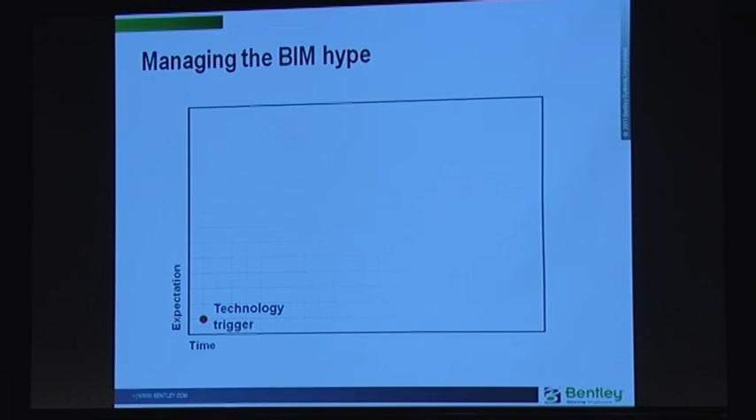Just want to touch on the BIM hype. There's an awful lot of hype around in the industry. You can't open a magazine or journal or sometimes even the financial pages now without BIM splashed all over it. People saying, we use BIM, we save 10%, we did this, we did that, it's fantastic. But there's a well-recognised hype cycle that applies to things like mobile phones, internet shopping. Something new comes out like BIM, and there's a huge amount of expectation.

Call it the peak of inflated expectation, where people come to a presentation like this, they see a great sexy video, what some people call Hollywood BIM. They think that's great. They go back and they spend thousands of dollars on a package of BIM, or millions of dollars in some cases. But they quickly realise it doesn't actually do them any good. It doesn't live up to the hype.

They install this thing on a big shiny machine in the corner, and it doesn't create their drawings automatically. They still get clashes on site. They can't set things out on site properly. So they've invested this time and effort. And in fact, some designers and contractors I talk to say they're spending many more times the amount of money to produce drawings or construction documentation using 3D tools, using BIM, than they were using 2D.

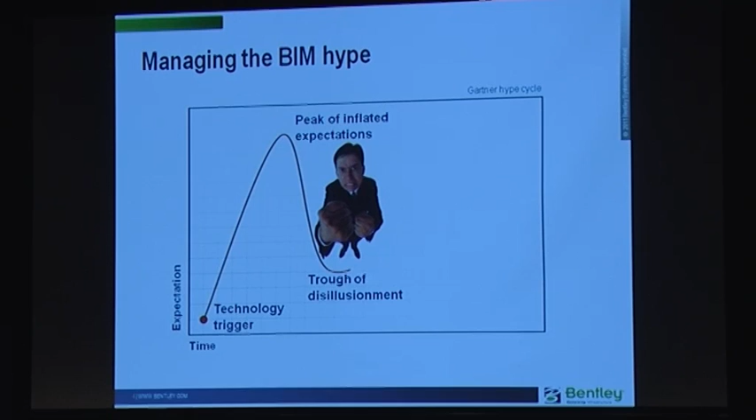So it's a big issue. Now, as we all know, BIM does give us benefits. You know, it does do some great things, but you have to work at it. So gradually people understand what it can do, and you reach a point when it's actually giving you some benefit.

Now, it could be that you're just doing 3D clash detection, it could be setting out on site, it could be cost estimating, any number of things that work for you as a business. But it's important to understand it's what it does for you individually, not just this great big panacea of BIM. So the trick is to try and go from somewhere halfway up on the left-hand side before you get to the peak and kind of head off to the plateau.

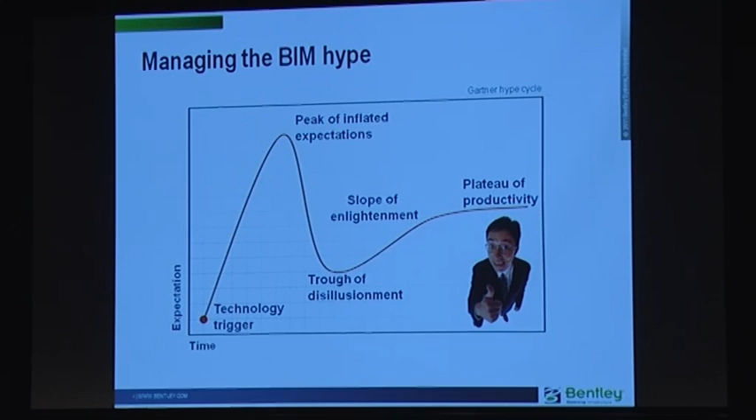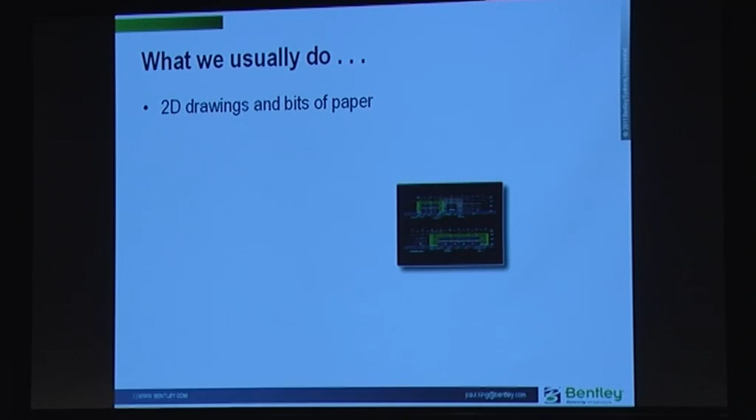So what do we usually do as an industry? Well, we use 2D. Okay, we've used 2D paper for years. Increasingly, we're using electronic paper, so we'll issue PDFs, but essentially we're just doing 2D. So we start off with the designer. The designer hands a whole pack of paper across to the contractor, and the contractor then sits on site, makes sense of this box of paper, or tries to build the building.

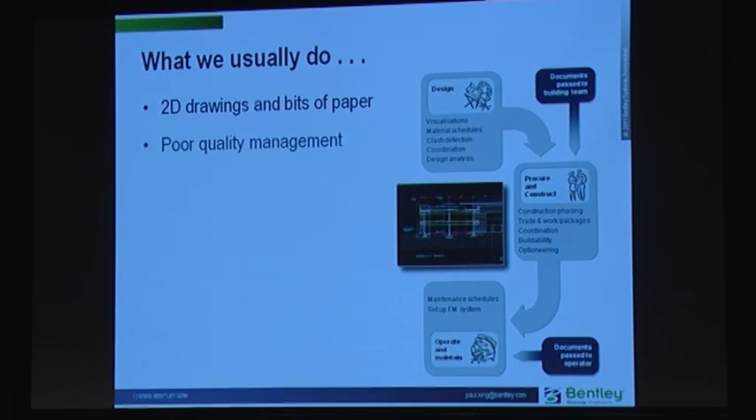And at the end of construction, passes across a room full of paper, boxes, plan chests, brochures, everything else, all goes off to the poor FM guy, who on day one of the contract opens up boxes and finds he's got the contractor's holiday brochures and memos and all sorts of things stuck in a box that's marked handover information. And we know it doesn't work. Again, without going into detail, we all know the issues about passing information around the supply chain, where it doesn't work.

And this figure, it's another waste figure, pick a number really. This was in The Economist magazine a couple of years ago, where they looked at global projects. And they said typically 30% of the project cost is waste. Now, some of that is rework, but a lot of it is in things like variations. It's in the fact that things go missing. There are errors in drawings, in site works, all sorts of things, but this all gets hidden in contingencies and extras and revised programs. But there's a lot of money in there that shouldn't be in there.

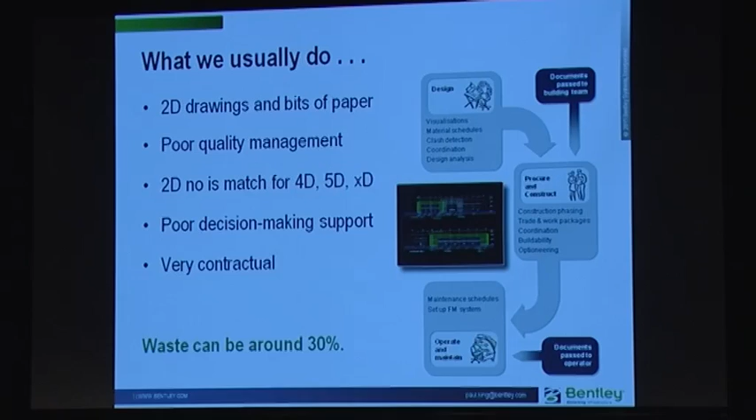And there was a report from the organisation called NIST in the United States a couple of years ago. It's quite a thick document. It's worth a read, but it's got some highlight figures in there. And it said that 40% of design time is just spent locating and validating information. So forget whether it's 2D or 3D.

I spent my time on site. You've got two drawings, exactly the same number, the same revision, but they show slightly different things. In one the manhole's here, and in one someone's moved it over there. And you spend time trying to work out which of those two is correct. Or maybe neither's correct. Maybe there's a third version floating around somewhere.

The second key point was about entering information once and reusing it. So this is starting to get onto the BIM theme, where people will create something and it's then reused for lots of different purposes. So you have this pump that sits in the BIM MEP system in your model. If that can be used by the cost planners, by the programmers, by the purchasers, it all starts to save money because you're reusing that information.

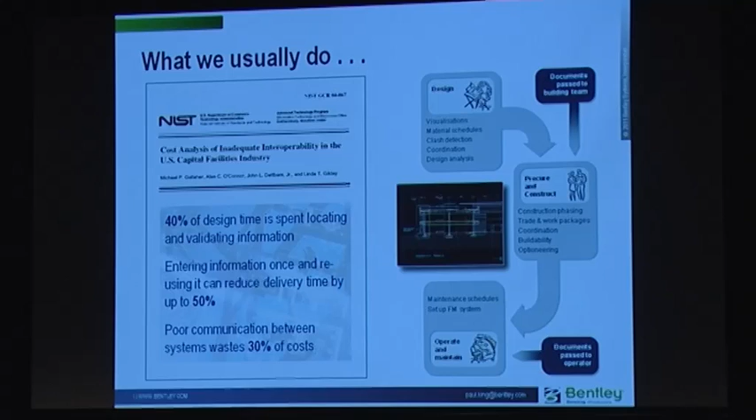And poor communication between systems, again, wastes a lot of money. So that's starting to get into things like BIM interoperability. Can I take a Revit file and put it into a Bentley application? Can I take a Bentley application and put it into an ArchiCAD file, and so on?

So BIM's a better way of doing it. Again, thinking about our own version of BIM, what relates to us.

Now, as an industry, we get very excited by what some people call Hollywood BIM. It's the moving images, it's that we sit down with clients and we show them, we walk through. It's all the clever, sexy stuff that looks good. It never really goes beyond that much. We're starting to go into construction, but we're not really integrated into construction yet.

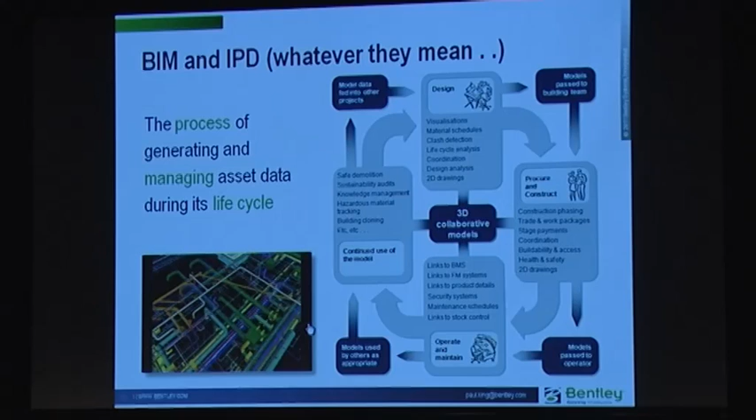Paul was just talking about these different file formats as well. As a contractor, you're faced with receiving all these different bits of information. A typical design team will be using Revit, ArchiCAD, Bentley Mechanical, a whole range of different tools, SketchUp. Next year there could be Google BIM or Google Mechanical BIM; all these things are constantly coming onto the market. And it's important that project teams can use the best tool for the job.

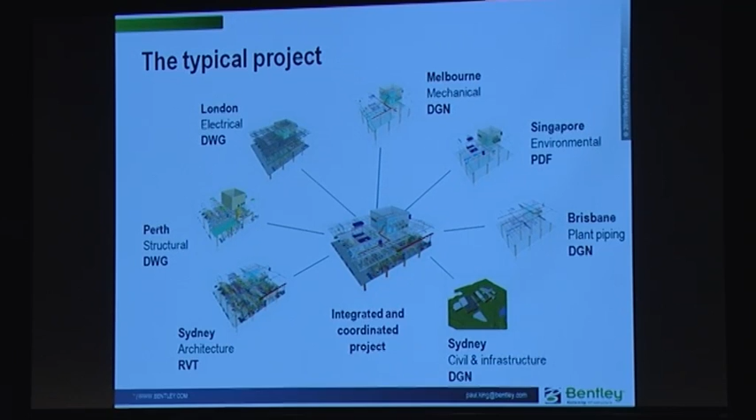It's very rare you can find one client that will say, right, we only use one package and only one version of that package. It's very difficult to do that. The Bentley approach is what we call federated models. And it's a very efficient way of working when you've got larger teams. So each discipline creates their own stuff, if you like, their models, their drawings, their spreadsheets. And in this environment, the important thing is that only the originator can change their content.

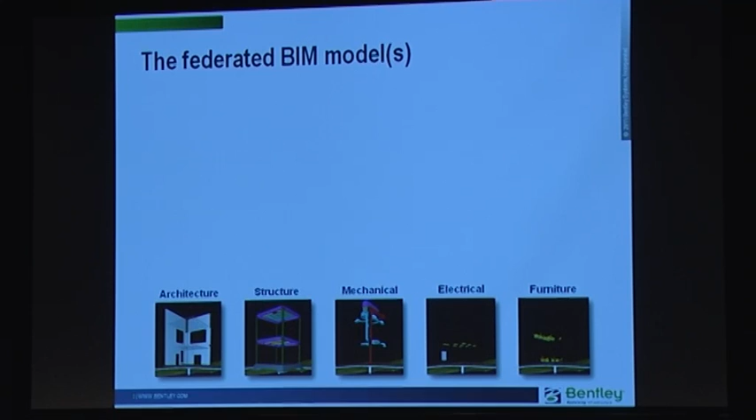So if the architect here is creating his walls, when he puts his models into the shared environment, you can't have the structural guy moving an architectural wall. Okay, so ownership has to remain with the originator. And it means you can bring those together, as Paul was just saying, for things like clash detection. We never clash a whole building in one go.

In my mechanical services background, we'd do things by floor or by zone, or you'd clash a plant room or a riser. So what you want to do is be able to bring that different content together at different times, in different formats, for different purposes, but do it in a way that's managed. So going back to ensuring if I'm bringing those different parts of the building together, I know that I've got the latest version. I've got the version that's correct for doing coordination.

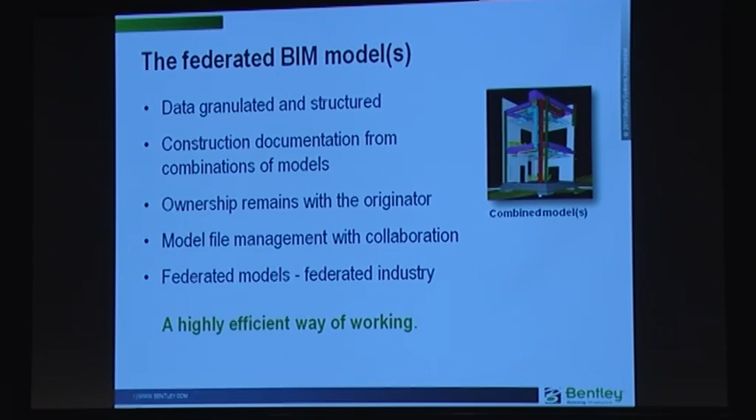So it's very efficient. Again, just a few models. We all do our own thing. We've got the structures, the mechanical, electrical, piping, hydraulics, all doing our different version of a design submission for that particular project. And we bring those together at different points for different purposes.

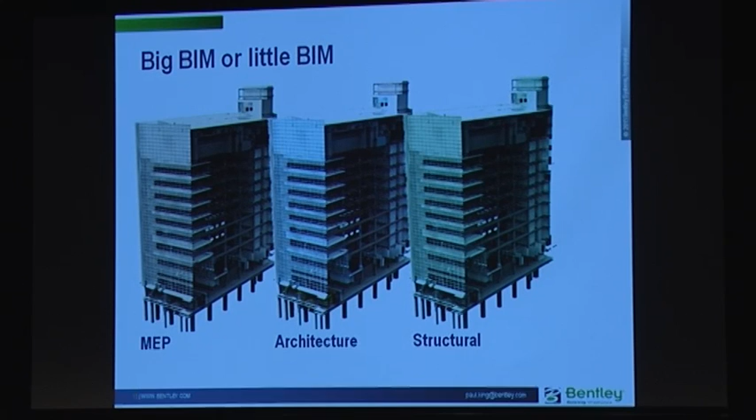And I think someone mentioned lonely BIM earlier, where you've got these pockets of expertise all doing their own thing. So in this case, the different disciplines are all focused on delivering their construction documentation for the project. And that's what we call little BIM. So it's giving benefit to individual practices, whether they're designers, contractors, or other people in the chain. But it's really about that individual task.

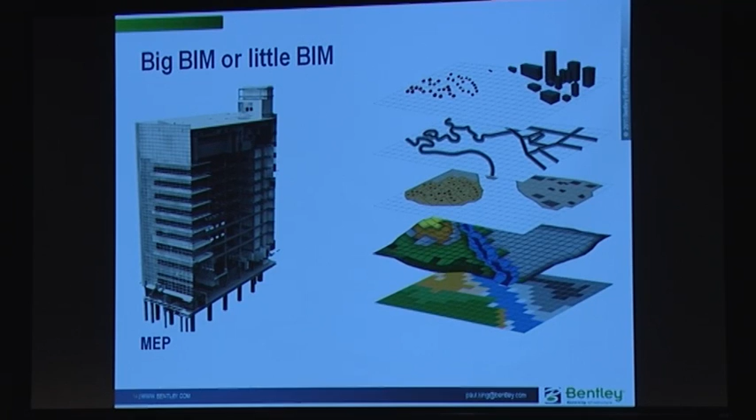But buildings exist in the real world. So they sit on a site. That site's got a topography. There are underground services. There are roads. There's rail, water courses. There's mapping. There's geospatial information. So although we talk about BIM, really all these other disciplines have got their own version of a model. So there's geospatial, power, water, bridge, and a whole host of others that all contribute to this virtual environment. And in Europe now, they're beginning to talk about asset lifecycle information modelling.

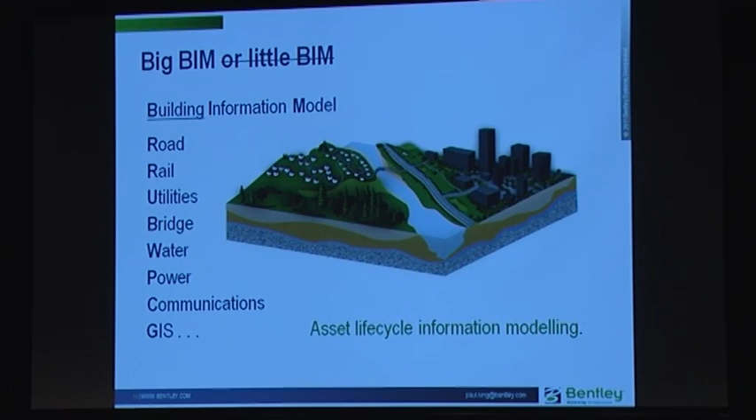Because when you talk about BIM to a road designer, they just think, it doesn't apply to me. I'm doing roads, I'm doing a different version. So it's not the building. But really building refers to the process of modelling. So it's more about the asset.

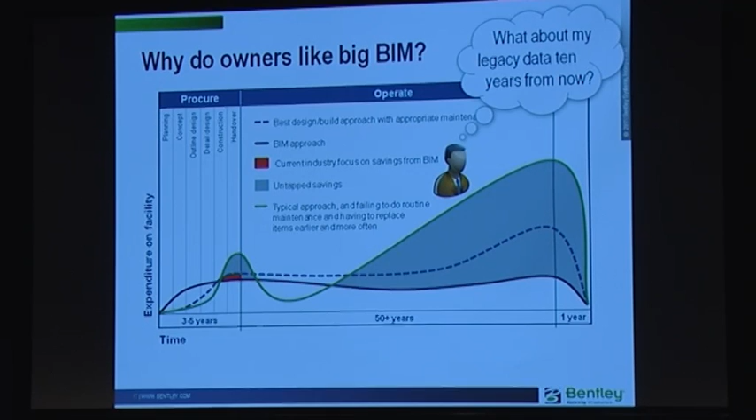Another thing I've recently been picking up on with owner-operators is they say, yep, that's great, that's why we want BIM, but what about my legacy data? I've got all this great stuff given to me as models or databases - what do I do in ten years' time when the project team's left, the contractor's gone, this particular software package is now two versions later, I can't read my old files? How do I manage that whole legacy issue? That's another big factor clients are starting to ask about.

So let's look at how we can start to address some of that with things like collaboration and coordination of information. I break it down broadly between pre-construction and construction. On the left-hand side, pre-construction and design, we're dealing with lots of technical content.

We've got models, drawings, spreadsheets, a whole host of technical content that makes up the design solution. And on the right-hand side, we've got the distribution of e-paper, essentially of documents, construction documents used for managing the installation.

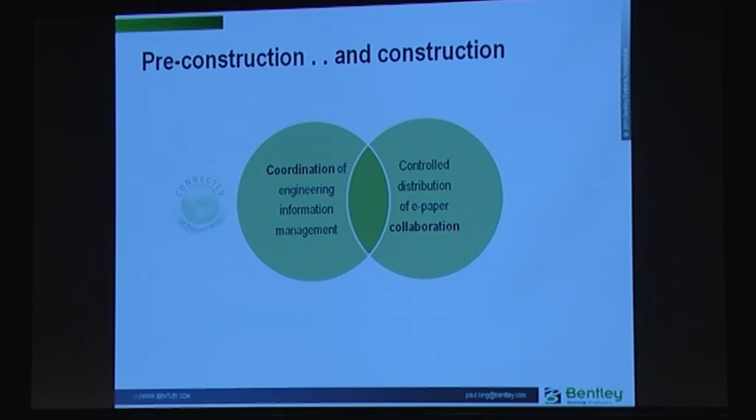There's a big overlap, and getting on to why I'm talking this afternoon - looking at ProjectWise. In the session we've got now, there isn't time to go into a presentation and show you some of the features and functions - we can do that outside or afterwards. But it's important to understand that relationship between coordination and collaboration.

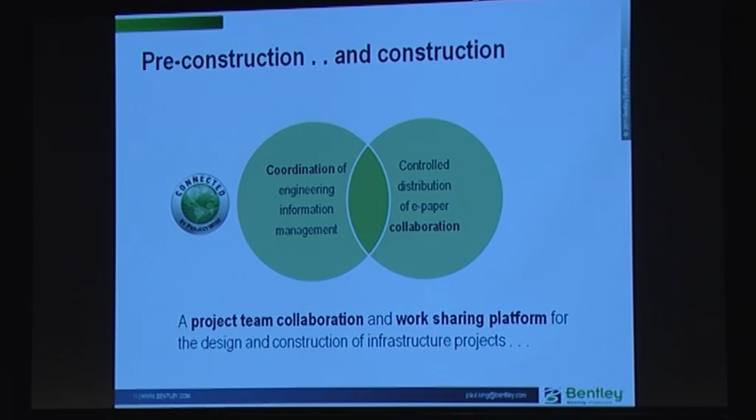Coordination at the start is all about ensuring those 3D models that get created, to create your construction documentation, are done in a controlled way. It ensures you only have one copy of something - you don't have multiple copies of the same thing floating around. ProjectWise is a way of creating a managed environment. So if you want the cost planners to be entering data into a particular model or drawing, they take that from a central repository. That means it can't be overwritten, it's the correct version to use, and it can't be overwritten by somebody else.

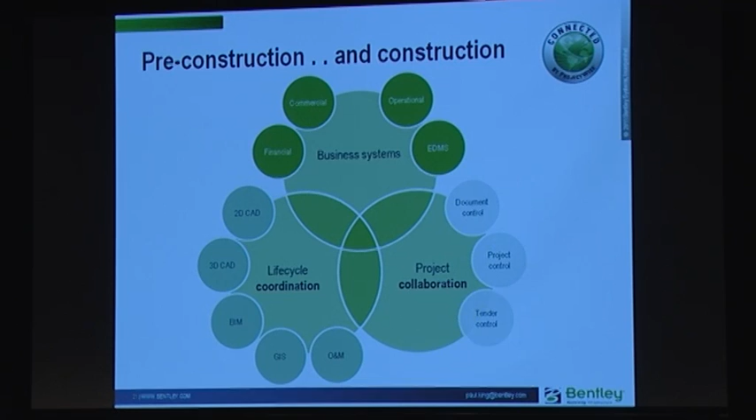And let's not forget, all this exists in the context of a business. Your company will have its own business systems for finance, HR - all these different systems that make up your environment in the company, and they're all interlinked. So in our coordination system, like ProjectWise, you're storing your drawings, your models, your data, operation and maintenance data, perhaps geospatial information. You've got your commercial systems. On the right-hand side for construction, we've got document control, project controls, all your tender information, trade package information, and so on.

So our model comes out on the left-hand side. It's all controlled within ProjectWise and managed in a federated way, so you don't have to have one big model - you can create lots of individual content that's linked together. ProjectWise will track the versions, the history - if you want to know who's opened the file, who last used it, what they did, even when it was deleted, you can see that.

And then during construction, if the project team wants to issue an RFI, for example, that takes a particular drawing or model, again, we don't copy something across from one system to the other.

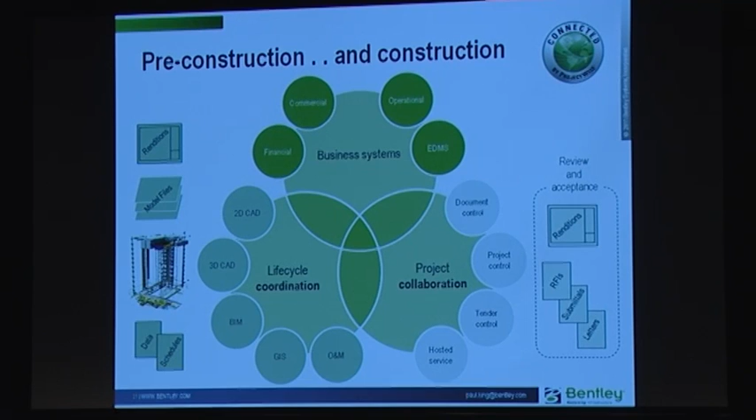That source content stays on the left-hand side within ProjectWise. Something like Primavera Contract Manager will just suck in and take out a link to that source file. And that's really important because this whole design iteration process goes on during construction as well. So if there's a change on site, you don't want the site agent to just take out a drawing and draw something in by hand. You want the structural engineer to move that wall or column and do it in a managed, controlled way, because they're the person that should be doing that. But all these things are linked together.

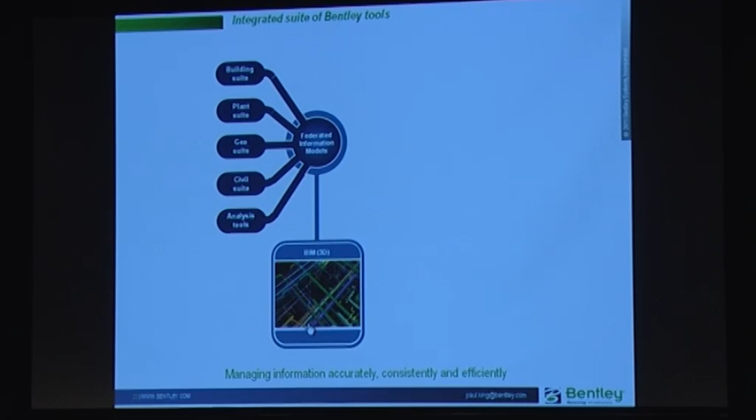So how does Bentley support these project teams? Well, everything starts with the models, with the drawings, with the content that's created in a coordinated way. Bentley has a number of applications broken down by suite, so building, civil, geo, and so on.

But importantly, Bentley's approach is to put a lot of effort into interoperability. Now, we're way off having that ultimate goal of one single transferable file type. That's some way off yet. But we do ensure that if you've got, for example, a Revit model, you can share that design data with someone working in the Bentley environment. Or you might want to take geospatial information and some mapping information.

FAB-MEP, for example, from TSI. If you want to take one of your Bentley models and put that into manufacture, again, you can take that across.

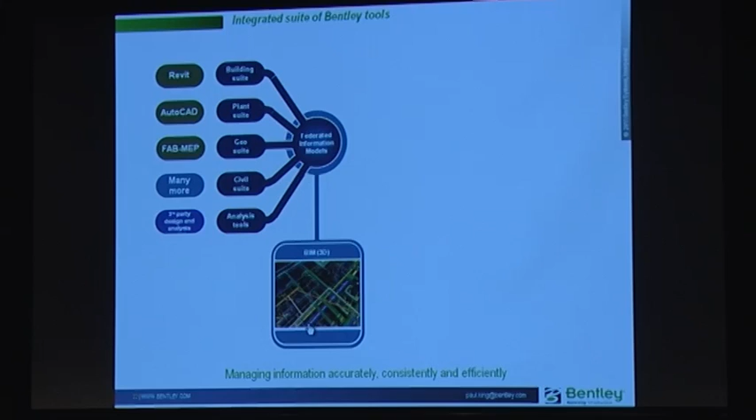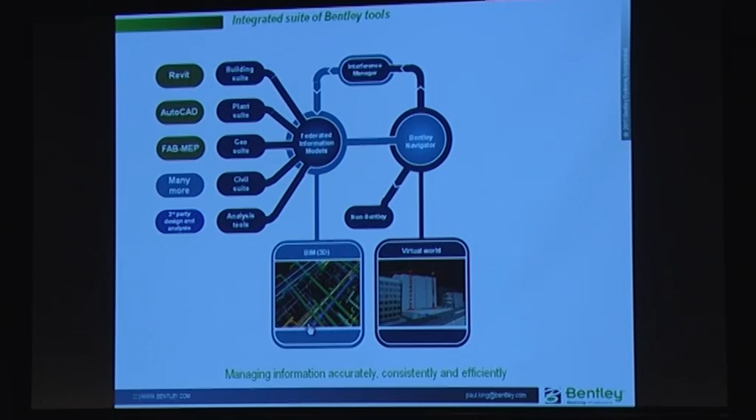Our version of Navisworks is Bentley Navigator, so whatever you can do in Navis, you can do in Navigator as well. And from that, you've got things like interference management, clash detection, and schedule simulation, 4D.

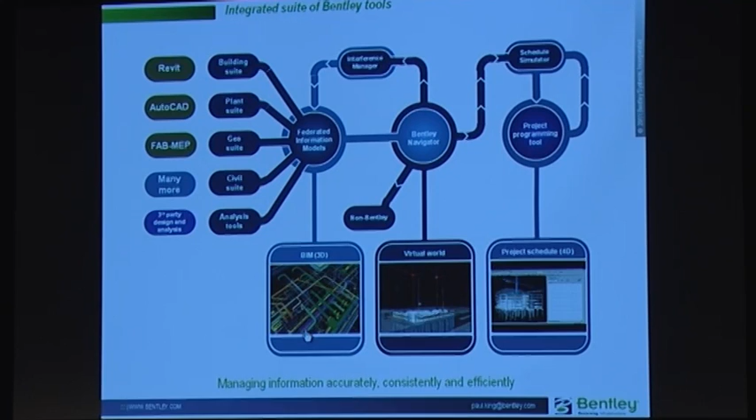Now, 4D is interesting to me coming from a construction background because I'd have design teams coming in saying, we're going to give you a model and you can do all this great 4D stuff. But in reality, the planners didn't want it. The planners are used to using their Gantt charts. They've got their own packages they like using. They don't want the 4D model. They might do it to demonstrate to a client how the building goes up, the logistics, but they don't use it for day-to-day work.

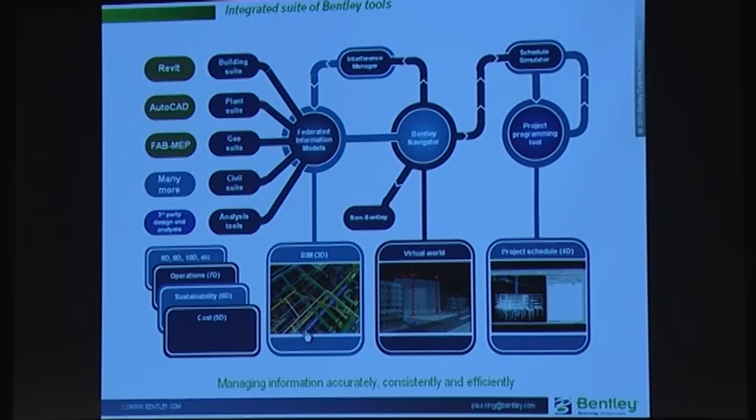And other people are talking about 5D, 6D, 7D, sustainability, life cycle, all these different things. But importantly, all this stuff is about reusing information, and it all comes from having that good quality design content. So once you've got that model, that data set up, correct, consistent and complete, all this other stuff can then flow from that.

And the final part of the jigsaw is then ProjectWise. So what ProjectWise does is manage all that technical content, wherever it's coming from, in a controlled way. So if you're doing a clash detection review or a design review, it's not a case of sending off a drawing or a model to an FTP site.

You go into ProjectWise, you assemble that content you want, you make your red line marks, your comments. That's then stored back in as an overlay file that notifies the person concerned they have to fix something. And because it's integrated as one managed workflow, it means you can track those changes and ensure things are corrected when they need to be.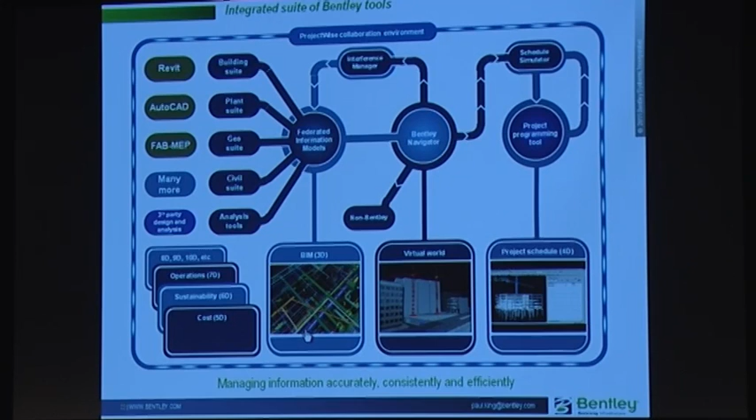So looking at ProjectWise for contractors specifically, if you're working in the mechanical contracting world, your designers are creating all your great stuff. When it comes to site, you've got this blizzard of information, all these deliverables coming at you. It's Revit, it's AutoCAD, it's Bentley, it's Tekla, it's SketchUp, it's everything - files, 2D, 3D. And the guys on site, as Paul was saying, it comes back to: well, okay, what do I build? I just want to know what to build. Yes, maybe it's in 3D, maybe it's in 2D, but I need whatever's appropriate for me.

Just to emphasize the fact, some people want models, but that's very rare in the industry - few contractors want models. Most people want a PDF, or they want a paper print, because that's what we've used for years. That works for us, we know that works. We're not saying it's the most efficient way of working, but people need to still have that in some cases. And again, ProjectWise will manage that and ensure it's delivered in the right way, the right content at the right time.

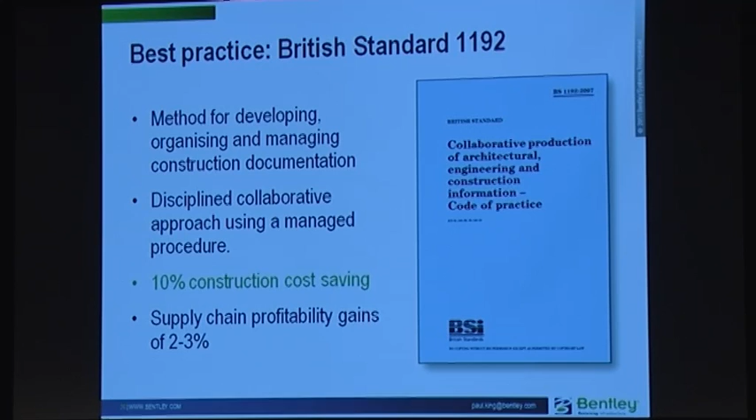So what do we need to do to go on this road to BIM? The first thing to say is it's okay to fail sometimes - not all this stuff works when you try it on every project. If you look at what we traditionally do in construction, whether it's a new CAD system, a new tool, whatever it might be, we think about it, we plan it, we try it, and then we'll try it for a long while to make sure it's okay. Then we try something else, and it's sort of slow and steady.

But really, with things like BIM and working smarter, any sort of new technology, if you can just try a few things, try something small, try a pilot project. Don't, for example, with the Trimble setting out system, think 'I've never used it before, but I'm going to suddenly set out this massive campus, this city-scale development, and try to do it in a week.' You start with a building or a floor, you try it with a few people that have been trained in it. So it's a step process, but recognize that sometimes this stuff won't work - you'll get some knockbacks. But providing your whole business isn't dependent on that process, you make much faster progress.

The other thing to say is that it's okay to be average. Part of the hype is that we sit in sessions like this with the vision of BIM, the 5-year vision where it's all connected and integrated and fantastic. But the developers I work with have a number of suppliers, designers, contractors, subcontractors, all doing different degrees of BIM, from 0 to 80%. Some are doing a bit of BIM, some are doing loads, with all their stuff in 3D with data.

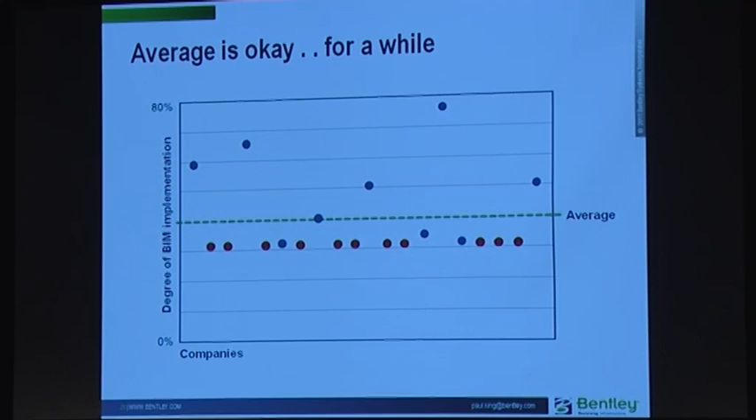So as a client, you have a supply chain like this. What the smarter clients are doing is saying to their suppliers, just aim for average. By doing that, everybody wins. It lifts up everybody, which means a few people who were above average before now slip below. But it's constantly moving. So developers and clients are beginning to understand it's not about going from doing fairly okay 2D to doing full BIM. It's got to be that process.

A few pointers on how to do this, touching on some points Paul was making earlier. The road to BIM - I call it the road less travelled, because whenever I show this to people, everyone nods and says that's exactly what we do. Yet when I go back and talk to them, very few people actually do this. But it's not difficult stuff.

So firstly, develop your BIM strategy, which sounds fairly obvious, but you need to ask yourselves, why are we doing this? What is it for you? Are you a main contractor, a second-tier contractor, third? Are you a designer, a supplier? You've all got different reasons for doing BIM in your companies. It's important to understand that and develop your strategy around it. Don't just go headlong into BIM and buying stuff because you think you should be doing it. Always bring it back to why are we doing it? What's the business case?

Once you've got that business case, you can get the finance for it. The key thing is to start developing some KPIs, because the board will ask, okay, we might invest $100,000 in product X or system Y, but what's the payback? When will I get my payback? What's the return on investment? So doing BIM is no different from any other business investment.

Then come the pilot projects, and it's really important to start small and build up. This is still fairly new stuff in terms of doing it well. So you need a few people well trained, you need to understand exactly why you're doing it, you need the right project in the right format, and you also need to develop things like documentation.